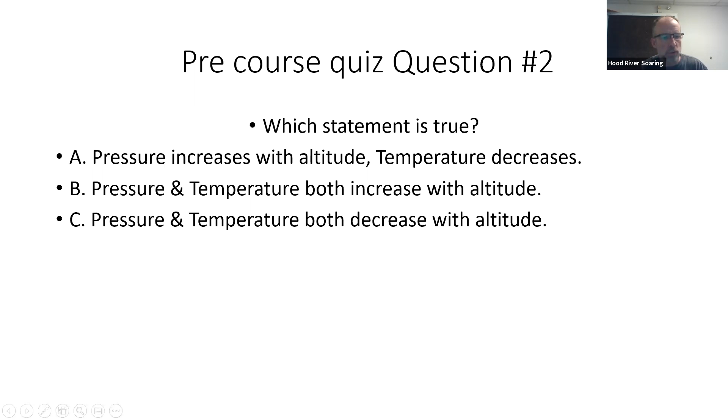Illustrate that as well. All right, so this is where I identify what the pressure instruments are. There are typically 3 pressure instruments in a glider or an airplane. They all have altimeters, and the altimeter gives you altitude. Remember, it's measuring pressure, but from that pressure it's giving you an altitude value, and it tells you how high we are. So how high are we? We want to reference the altimeter to know how high we are.

It's especially important in a glider to know how high you are, because that's the only energy that you really have in a glider. You don't have an engine to go higher. The only way that you have energy to go anywhere is with that altitude. And to determine how far you can go, you need to know what the altitude is. That's fuel in the tank in a glider is altitude.

Next up on pressure instruments is the airspeed indicator, which tells us how fast we are going. We'll go into a little more depth on that, but they are important. Notice the altimeter is important because it tells us how far we can go within a glider, and also it tells you, can we clear any terrain that we need to. But the airspeed indicator is important to know how fast you're going, because you need to have your airspeed.

Anybody who's flown already knows how important it is to have your approach speed correct. If you're flying too fast, you're going to float and use a lot more runway. If you're going too slow, the glider could stall. Very, very important instrument - many gliders, that is a no-go. If the airspeed indicator does not work, you cannot fly it. You can fly without an altimeter, but very seldom will you have an aircraft like this that you can fly without an operational airspeed indicator.

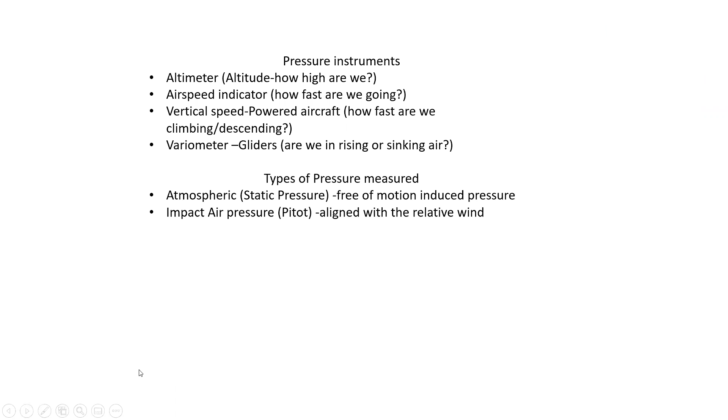Hey Steve, so a question, is atmospheric pressure the same as barometric pressure? Yes, yep, that's pretty much true. I think we look at it as atmospheric pressure in an aircraft because you are moving through the air mass, whereas typically barometric pressure, you're just thinking about it like most of us, on the ground - what's the barometric pressure at this point on the ground? But yes, it is the same thing.

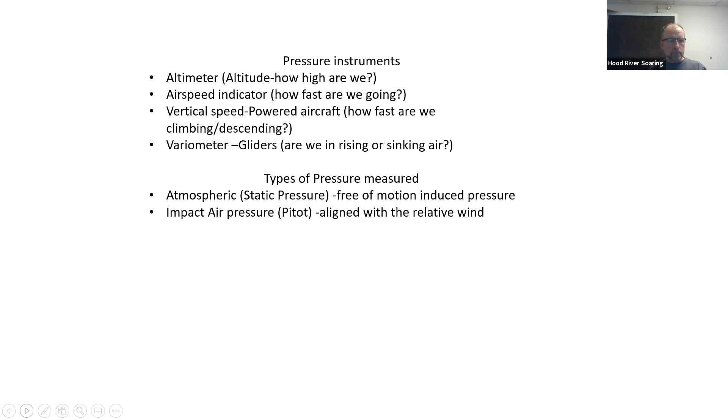The thing you need to know when you go to answer questions is that if something happens with the static system, it's going to affect all of these instruments. If something happens with the pitot tube, it's only going to affect the airspeed indicator. So that's something to remember. We'll skip forward here, next frame.

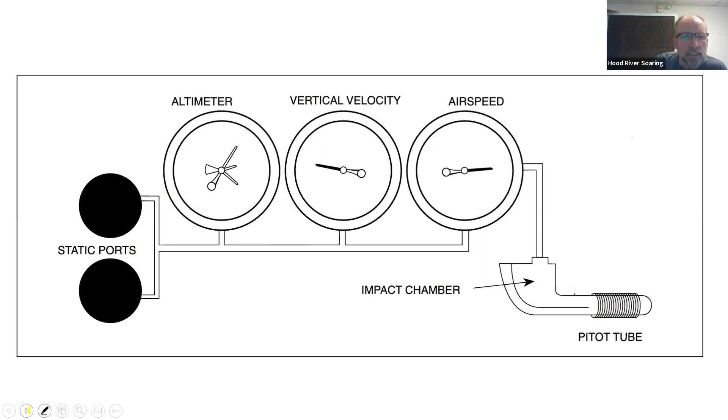One thing we as humans don't think of is air having weight or mass. We're born and live most of our lives near sea level, and when we think of air, we think of nothing, but that is not true. Air weighs 0.08 pounds per cubic foot. So in a normal bedroom, there is 50 pounds of air. You don't know it, you don't feel it, because we are used to that.

Much like a fish at the bottom of the ocean doesn't probably perceive that the water exists - it's always been there, they don't really think about it. You can't see it, but it's certainly there.

Now, where air pressure and the mass of the air becomes evident to us is when we have motion or movement involved. Like if you're going down the road and you roll down the window in the car and you stick your hand out, now you're feeling the mass, you're feeling that air. So now we can feel it - still can't see it, but we can feel it. And that's the same thing when the wind's blowing, then the mass of the atmosphere becomes evident.

Any questions so far? Anybody have anything they want to ask there?

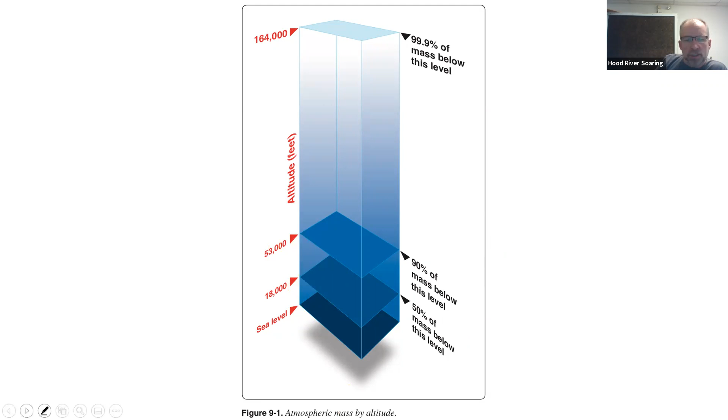Okay, next up, next question, next one. Okay, so here we go. This is a kind of similar illustration, but this adds a few things that you as pilots are going to have to remember.

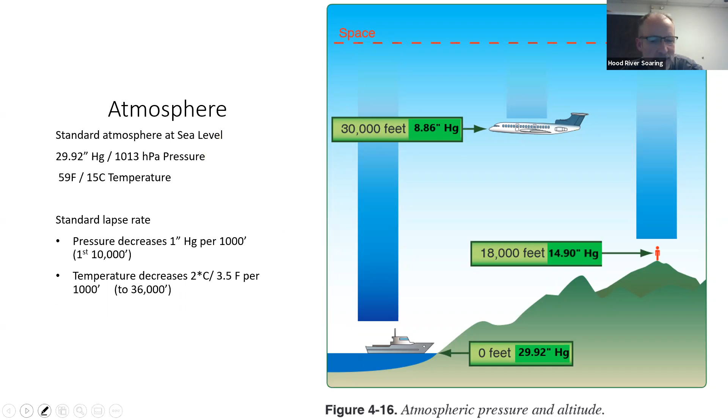But these are the important ones to know right now. Pitot tube facing forward—on some, they're out on the wing facing forward. That pitot tube wants to be out in undisturbed air. You don't want it real close to the fuselage or anything where interference air pressure could alter that measurement, because you want it to be as accurate as possible.

The static ports are on the side, and if you can imagine, those are not facing forward, so they are not going to get any increased pressure from ram air. That's what that's called, is ram air. Pitot measures ram air pressure. Any questions about that?

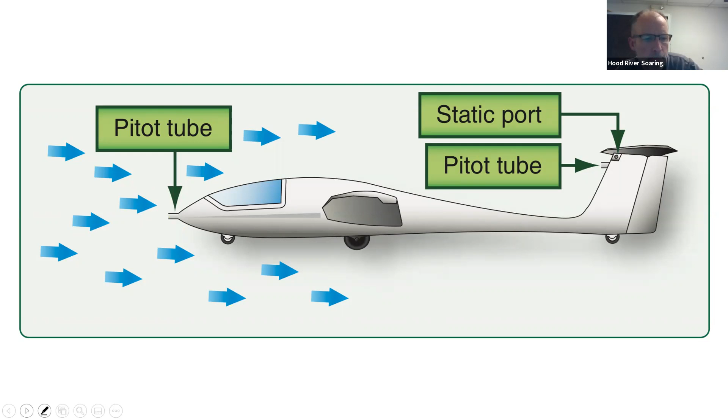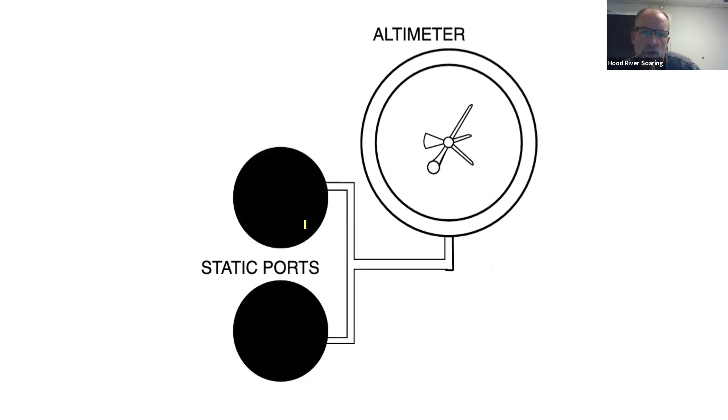Okay, so here's the diagram for the altimeter, just broken down by itself. First instrument we're going to really talk about is the altimeter, and this is your altimeter, and it goes out—this is your static system, goes out the static ports. That's all the altimeter reads, is this pressure, static pressure on the side of the aircraft, and that's how that works.

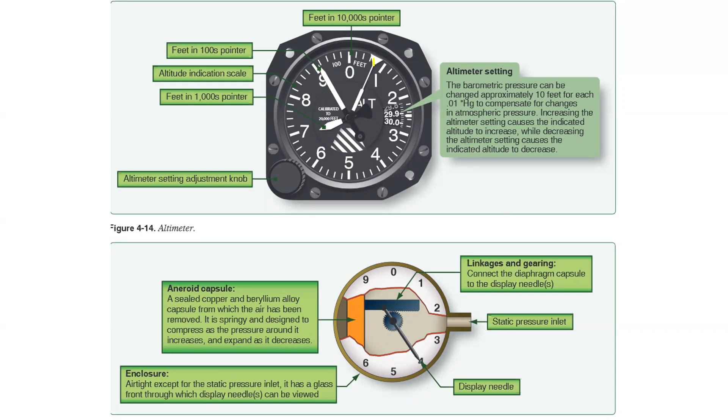I see a question pop up here: what is the triangle touching the 10,000 foot arm? The triangle, I'm not quite sure. Ethan, can you unmute and help me determine? The 10,000 foot one, the super skinny one, at the very end. Oh, that's just part of the pointer, so that will move along. Yeah, that's just part of it.

On this, many altimeters look different. Some don't have a 10,000 foot marker. There might be a little window that rolls over as you go through the 10,000 foot mark and you start counting up again. So this is generic, but yeah, that's just part of the needle, it has no other bearing.

Any other questions about this? Does anybody have a question about how this pressure increasing or decreasing would make the needle go up or down, or why the pressure is increasing or decreasing inside it? Any questions about that? Okay.

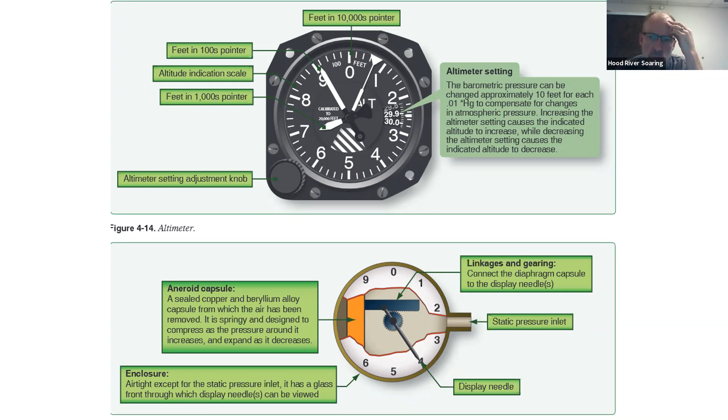Moving forward, okay, so here we have some altimeters. I'm going to pick on some people to tell me what these altimeters read, so you can start taking a look at it, see what you think they read, and I'll pick some people to unmute and tell me what they see on these altimeters.

While they're taking a look at that, prior to takeoff the altimeter should be set to the current altimeter setting. You'd get that from a tower or weather report, or for those of you who've been at Hood River, there's a frequency there for AWOS that will tell you the current altimeter setting. You can dial that in right here.

Now, you may have noticed we don't really do that with the glider. We know what the altitude is at the field, we know it's 638 feet, we usually dial that in for 600 feet. If you know what elevation you're at on the airport, you can also do it that way. You could set the pressure from an official source for that time, and your altitude should indicate field elevation, or you can set field elevation and from that tell what the local altimeter setting is. So it works both ways.

If the altimeter setting is not available, the altimeter should be set to the elevation of the departure airport. One thing to think about is that airports are not all totally level, so if you're really looking for an accurate altitude setting, you need to know the altitude on each end of the runway -- it might be 30 or 40 feet different at different points on the airport.

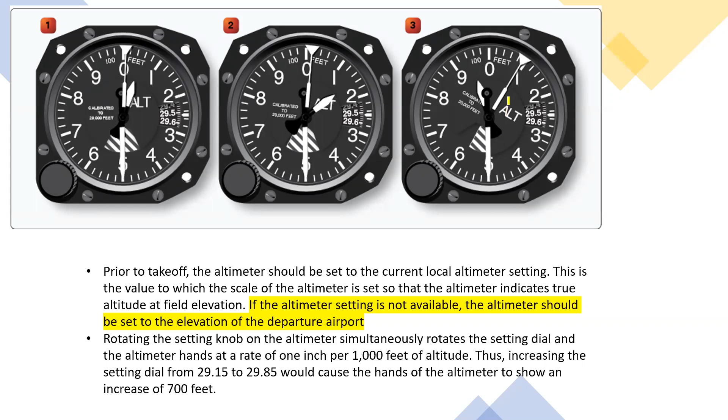Oh, so it's 9,500, yeah, 9,500. So that's it really, there's no tens of feet here. So this would be, it shows it's just short of 10,000 feet. If you went up another 500 feet, this would wind up here to the 0, that one and these would both be pointing out, and that would be right at the 1, then you'd be at 10,000 feet. But you're just 500 feet short of 10,000. Does that make sense? Yeah.

Okay, cool, good. All right, and this is something that with practice you'll just glance at it and you'll know it, but it takes a little while to get your head wrapped around it. So definitely, this is why we're having class, to figure these things out. All right, does anybody have any other questions about what these altimeters are reading, or any confusion about what they're reading, or anything here that we've followed so far?

The black and white stripes, down here at the bottom. You know what, I don't know what those mean. I'm not sure what those are, but we can find it out, we can look it up. I will look that up, because I want to tell you that preparing this class, I've learned a few things that I didn't know or didn't know very well.

So this is a learning experience for all of us, and as you progress through your aviation career, you're going to be constantly learning. That's really one of the cool things about flying for me, I love learning new things, and I like things that are a little bit complicated. So we're all going to be learning in this ground school course, including your instructor. And one thing I've learned is that I'm not going to try to tell you that I know something I don't know, I'm going to admit it. I just don't know, so I'll look that up, I'll get back to you. It was Vince that asked that.

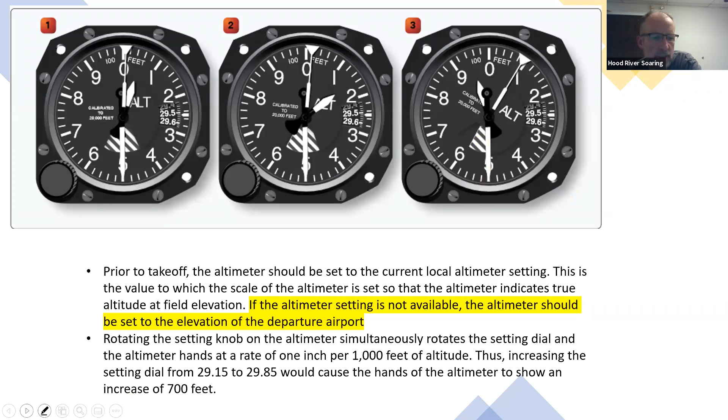All right, so okay, let's see, we're going to move up to the next frame here. I can get it to move. Okay, so different types of altitude.

When we put this ground school together, there was some question. People were interested to know what different acronyms meant in aviation, and that's something that we, as you know, have been flying for a long time and have picked up on a lot of this stuff. You learn it as you go and don't really think about it too much. But somebody who's just coming into it, they're overwhelmed by all these terms and acronyms. So we're going to make a real concerted effort to focus on terms and acronyms associated with aviation. These are items you're going to want to commit to memory as well.

So these are different types of altitude. Indicated altitude is the altitude you read off the altimeter. You look at the altimeter and that number, that's indicated altitude. You may be flying along and air traffic control or a tower might ask what your altitude is, and you're going to report back your indicated altitude. That's what you tell them.

Next up is absolute altitude. Absolute altitude is your height above the surface, above the terrain. So if your altimeter shows you're at 10,000 feet, but you're over Hood River, which is 600 feet, then your absolute altitude is 9,400 feet. That's your altitude above the ground, and that obviously changes as you're flying along. You fly over a mountain, that can change dramatically. The altimeter does not tell you how far you are above the surface. It tells you how far you are above sea level when the altimeter is set with the correct altimeter setting. So absolute altitude is the altitude above the surface.

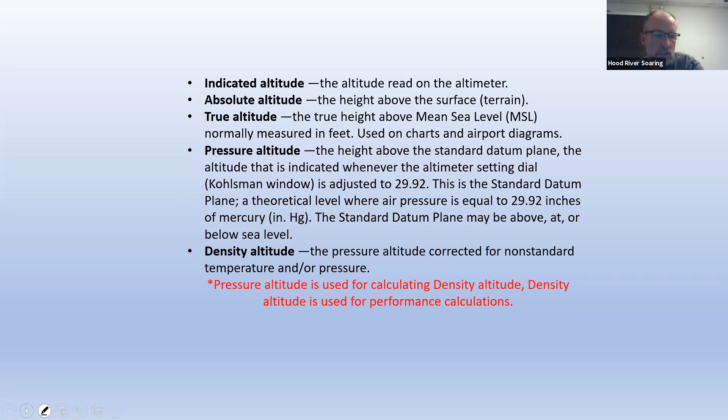So when you are planning your takeoff, or going to land at an airport, and you need to find out how much runway you're going to use, or how fast the airplane or glider would climb, that's where you will use pressure altitude and density altitude. Pressure altitude is used for calculating density altitude, and density altitude is used for performance calculations. So this is all these are ever used for, figuring out the performance of the aircraft you are flying. I've got some additional slides here that hopefully will illustrate this a little better for you. Does anybody have any questions so far? Please let me know if you do.

You're flying along and you're actually flying with these important ones: true altitude, expressed as MSL, mean sea level, altitude above sea level. That's what you will have on your altimeter if you have it set to the correct altimeter setting, which you would get from weather reports. Absolute altitude, once again, that's not shown on the altimeter. The altimeter does not know how high you are above terrain.

There are other instruments that may tell you how high you are above terrain. Usually those involve radar, or they might involve GPS, because GPS can determine your altitude and also the elevation of the terrain below you. It could give you an absolute altitude indication, but the altimeter is never going to tell you your height above terrain. That's something you've got to work out based on your charts and knowing how high the terrain is, and then how high you are flying.

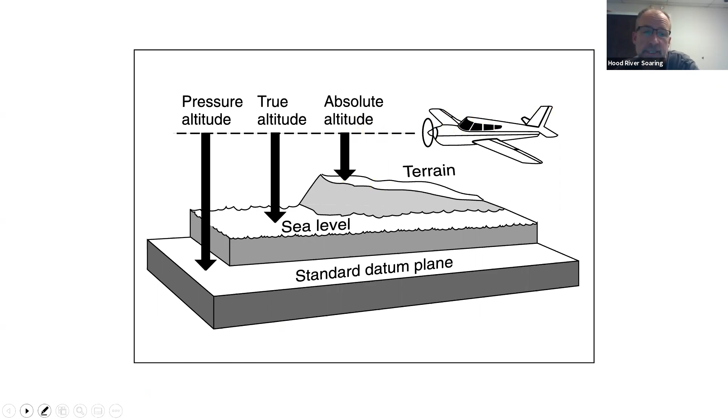Any questions about that? All right, I must be a great teacher, no questions. So...

Let's see here. So the last thing we need to discuss that's important for you to know for your practical test—there are some questions that ask you this. Fortunately none require you to do any math or come up with an absolute number, but they will ask you to understand the concept. So this is the concept. When I first started learning to fly and taking ground school a long time ago, I remember this, and it still sticks in my mind.

It's a rhyme that pilots use to remember something important: from high to low, look out below; from low to high, you're in the sky. It's pretty easy to remember a little rhyme that helps us remember this principle, and sometimes it can be a little difficult to wrap your head around. So I'm not going to get into great detail, but I'll try to give you the best information I can.

When you're flying between areas of non-standard pressure—we know 29.92 is standard pressure, but that doesn't really exist, especially across a wide area. If you're flying a long distance, or in the air for quite a while, like in a glider flying 3 or 4 hours on the ridge, that pressure could change as you're coming back. Fortunately we can adjust for that. We can call in or dial up the radio, find out what the AWOS says the pressure is, and get our altimeter corrected as that pressure changes.

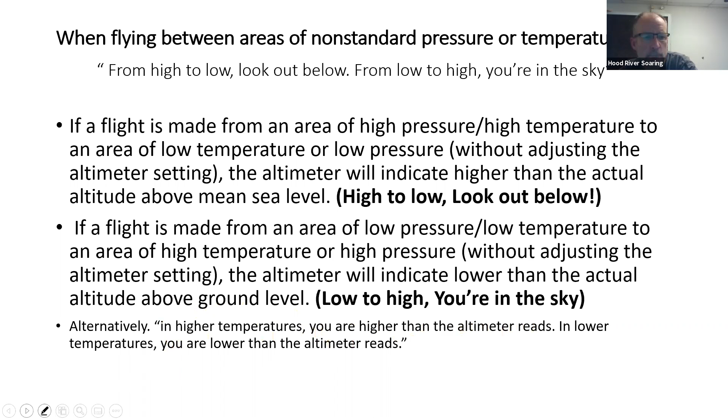I've got a couple illustrations here that line this out to illustrate it a little better. So here is 15 degrees Celsius, 59 degrees Fahrenheit. Let's see, how about...

Vinny, unmute your mic here real quick, I got a question for you. You with me? Yeah, sorry, I just got a movie in the background. Okay, great, cool.

So Vinny, right here in the middle of this illustration, over here it's 30 degrees Celsius, which is 86 degrees Fahrenheit. That's pretty hot. And down here on the other end, we've got 0 degrees Celsius or 32 degrees Fahrenheit, that's the freezing level. That's pretty cold.

What about this one here? What are you reading here for temperatures, right down at the bottom? What am I reading for temperature? It's right on there: it's 15 degrees Celsius and 59 degrees Fahrenheit.

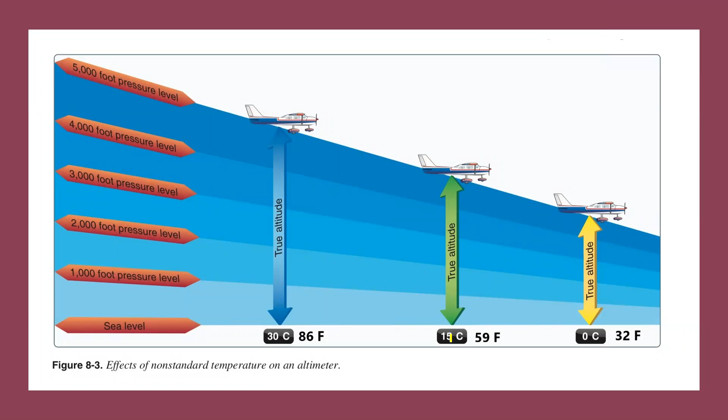Okay, all right, and we just talked about that a little earlier. I said we needed to commit that to memory. What is that temperature? What can you tell me about that temperature? That's standard temperature? Bingo, that's right, that is a standard temperature. And at standard temperatures, there's no variation in your altitude.

So the true altitude, your indicated altitude and true altitude are correct. If your altimeter is reading 5,000 feet, you are at 5,000 feet when the temperature is standard. Does it make sense? Yep, makes sense.

Okay, all right, all we're talking about right now is just variations as far as the temperature, because that's what we're talking about: high to low, look out below. We're looking at that as a perspective. So at standard temperatures, it's right.

Now look back here, it's much hotter, it's warmer. Warm air expands, it's spreading out, and what you see is that these pressure levels are also spreading out. So back here we're showing we're at the 5,000-foot pressure level, so the altimeter sees a pressure that it interprets as being 5,000 feet, but we're not at 5,000 feet, we're well above it, we're up here, maybe it's 6,000 feet. So colder... I mean higher temperatures, you're higher than your altimeter is indicating. Low to high, you're in the sky, you're high.

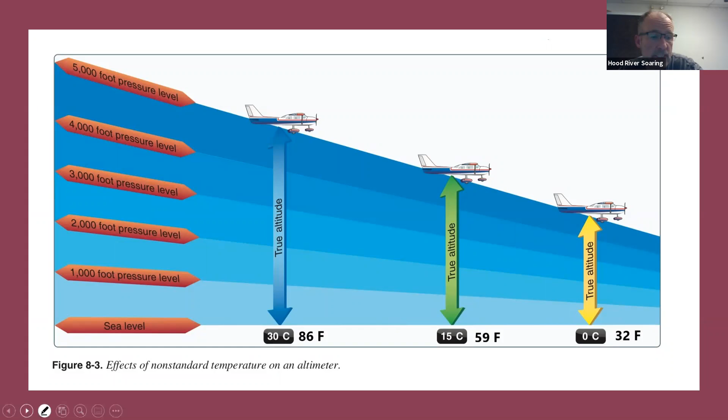Here's another one that illustrates it. Your reported altitude, let's say this is 5,000 feet. If you're in higher temperatures, you're actually higher than what your altimeter says, which is less of an issue than when you get to a cold temperature and you're below what your altimeter indicates. So what we've discussed here are ways the altimeter could be inaccurate, which is important for you to understand.

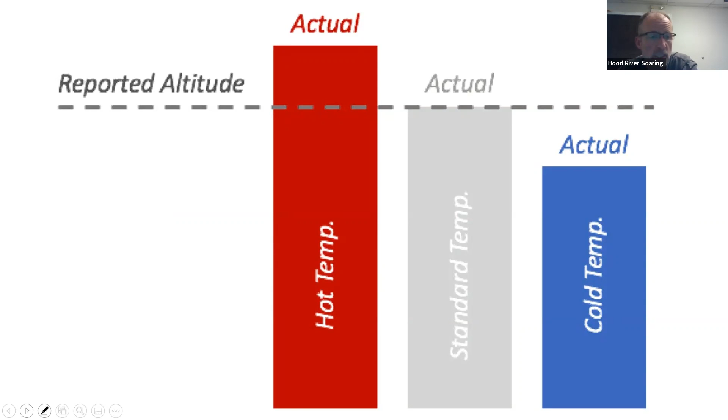Here, a temperature of -10 degrees Celsius, and the aircraft altitude is 1,000 feet. So we have -10 in this column, and the aircraft altitude at 1,000 feet. Your altimeter is showing 1,000, that's your indicated altitude, but the error is 100 feet below that. So the altimeter setting may place the aircraft as much as 100 feet below the altitude indicated. That's the scale of error we're talking about.

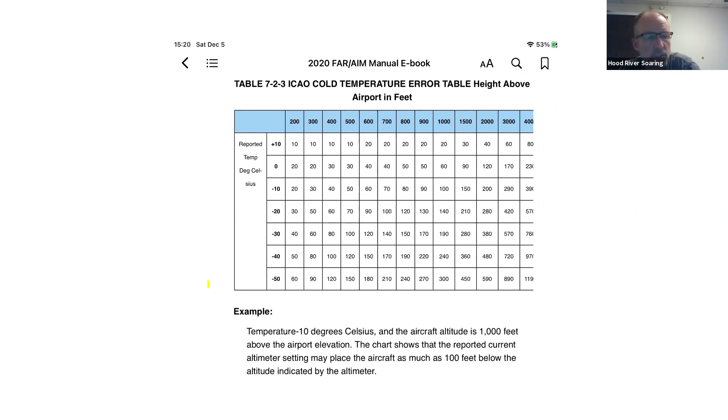Maybe not a deal breaker. Closer to the ground, it's less of an issue. At higher altitudes, it's more pronounced, but you do need to know: high to low, look out below; low to high, you're in the sky. Commit that to memory, you're going to need it to answer some questions on the written exam. I think that pretty much covers altimeters.

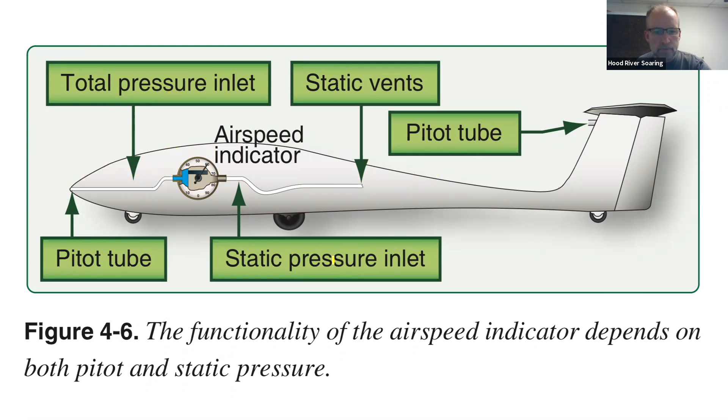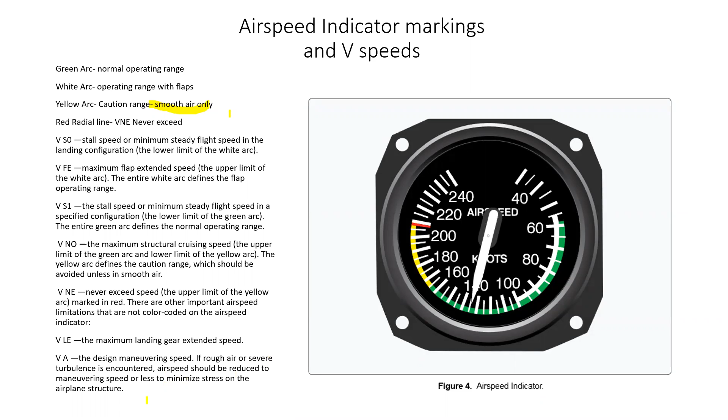There are other important airspeed limitations that are not color coded on the airspeed indicator: VLE, the maximum landing gear extended speed, and VA, the design maneuvering speed. If rough air or severe turbulence is encountered, airspeed should be reduced to maneuvering speed to minimize stress on the airplane structure.

So how about VA? Can you find VA on this airspeed indicator and know where that's at? Okay, I'm going to hold you up there. I'm not supposed, as an instructor, to ask any trick questions.

VA is an airspeed that's never shown on an airspeed indicator because it changes depending on the way the aircraft is loaded, so that's something you have to calculate. A heavier aircraft, believe it or not, has a higher design maneuvering speed, and when it's more lightly loaded, you can't fly as fast. Once we get into some aerodynamics, we'll go into that in detail so you'll understand why that is true. But VA is not depicted on the airspeed indicator.

And VLE, maximum landing gear extended speed, that's also not shown on this. VLE might be important in a glider because some of them do have retractable gear, though whether or not they have a maximum landing gear extended speed, I'm not sure.

Okay, thank you very much, Vinny. All right, so those are your V speeds.

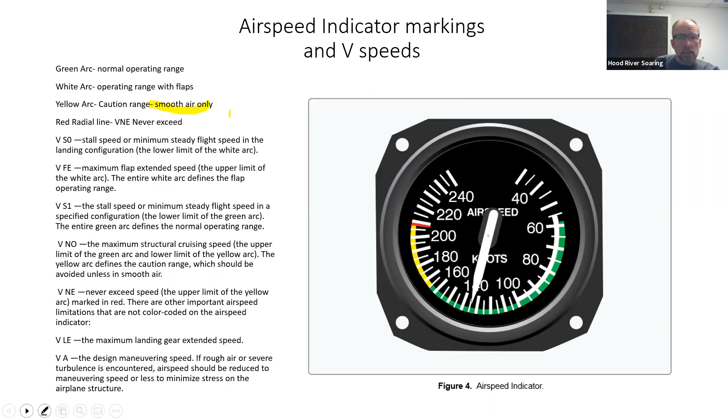All right, so here is an airspeed indicator, similar to the picture that we saw previously of an altimeter. Only thing is, on an airspeed indicator, remember we have two pressures that we are comparing.

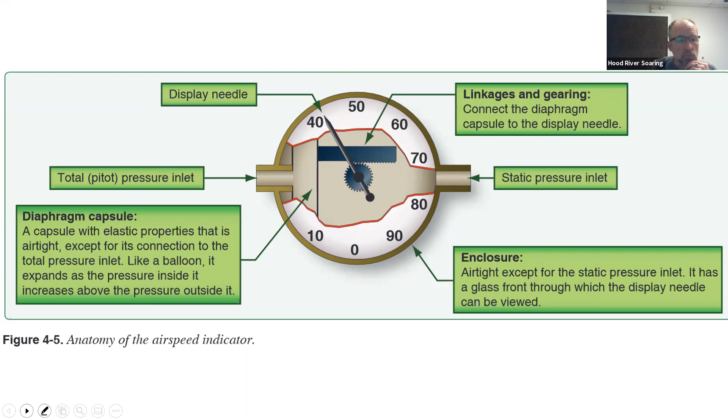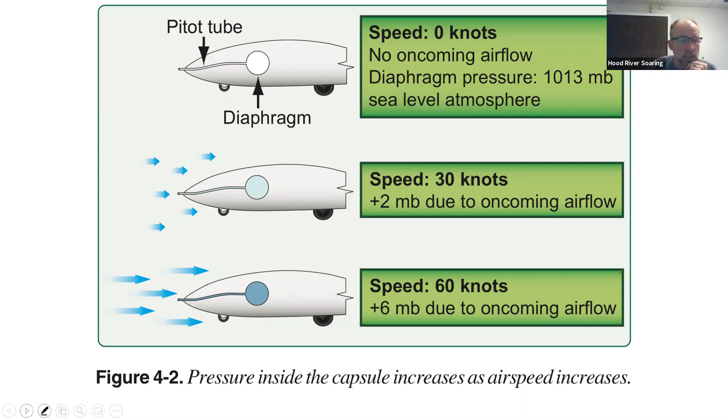It really is. They're really pretty simple systems. They work very well, except when there is a problem.

And that's this here. Here we're going into the section about problems. What are the potential faults? The potential faults in a pitot-static system are if they are restricted or plugged. There the pressure can no longer travel, or the air molecules can no longer travel in or out through those ports to the instrument. And that would be caused by dirt or debris in the lines or at the ports.

That's why we cover up a lot of these instruments, like the pitot tube. We're going to cover it up when we're not using it so that an insect doesn't crawl in there, or dirt and mud might go in there when we're not flying. So we inspect those during our pre-flight inspection. Insects could also possibly block that.

And here's the big one: ice, and not so much on gliders because we're not going to be flying in known icing. But one thing you could get, now that we're doing winter operations, is ice could form over these ports while it's parked. So it's very important to make sure there's no ice restricting or blocking that.

Other possible faults, although less common, would be leaks in the system - possibly a line that's loose, or maybe a line has a pinhole leak in it, or something like that. Very uncommon. It could happen after it's been repaired. Maybe the mechanic is supposed to test that stuff, but that's someplace you need to be especially conscious of problems - after maintenance.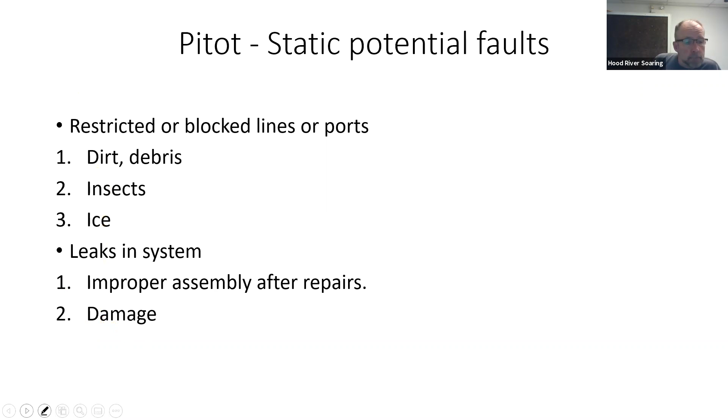This is probably, of all the problems you could have, airspeed is a really critical instrument to have, and you need to know it, but if it's registering 0 and you're flying, you know that you're not flying 0. So this is a problem where, hey, I cannot trust this, so we're going to forget about referencing that, and we're going to use whatever other means to ensure that we're flying at the speeds that we need to get back on the ground.

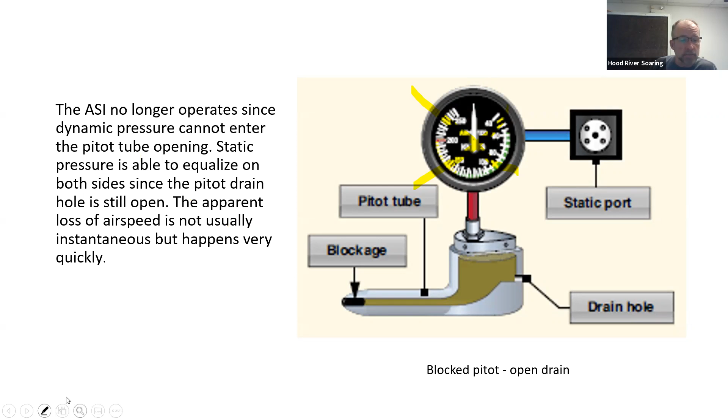Anybody who's been flying knows that when you're diving, airspeed typically increases, and when you're climbing, airspeed decreases. This is doing the opposite. Pilots have actually died from this. In instrument conditions or at night, they misinterpret it, not realizing it's frozen up. They might be descending, the airspeed drops, and they think they need to lower the nose to keep airspeed up. They push the nose further forward, it continues to drop, and they end up crashing.

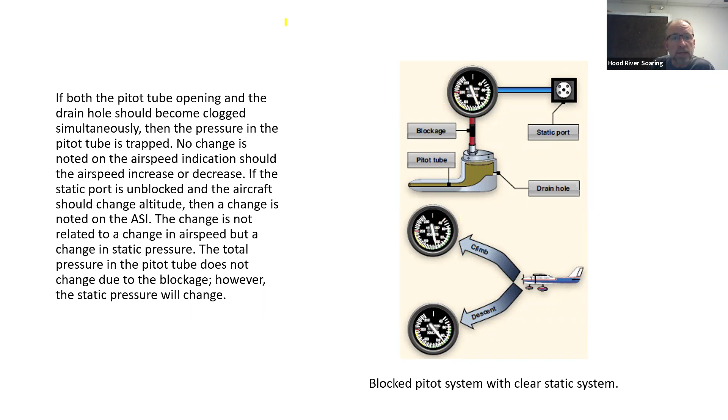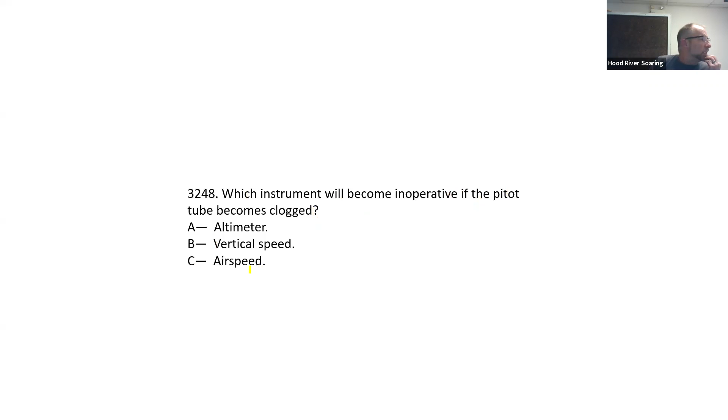All right, so what instrument will become inoperative if the pitot tube becomes clogged? We had 60% say airspeed indicator, and that is correct. The airspeed indicator is the only instrument that the pitot tube feeds.

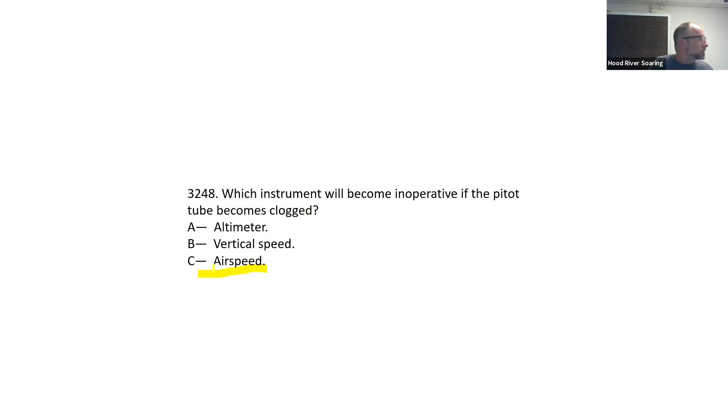All right, so we're going to go to the next question, 3249. Let me move up. Okay, 3249, everybody read that, see how the question pops up in your quiz. Which instrument will become inoperative if the static vents become clogged?

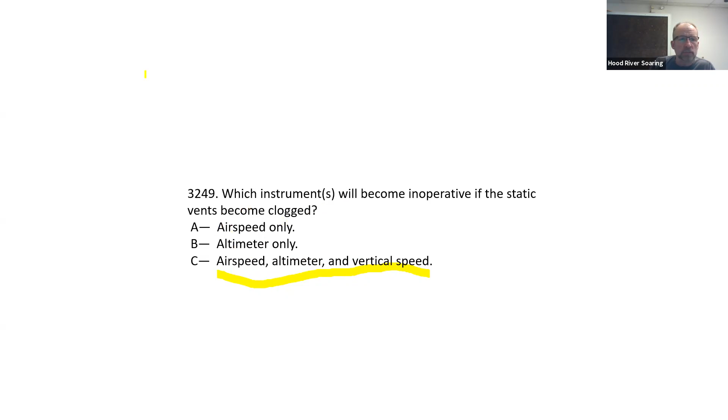Good, all right, so next up is 3262, you should have that one up on your Slido. Pitot system provides impact pressure for which instrument?

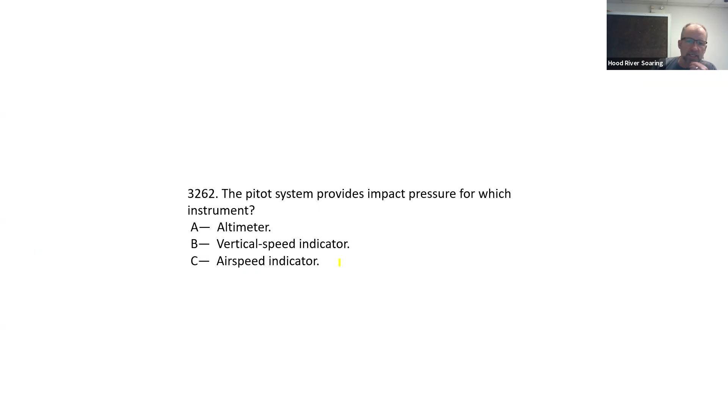Great, everybody got that one right. Fantastic, airspeed indicator, pitot system. Excellent, and these are actual questions, so if you're going to take the written exam, these are the ones you're going to see or may see on the exam.

I'm sort of noticing a pattern of C. Yeah, I know, I did too. So I guess if you're taking the test and you don't know the answer, you can guess with C. I would suggest knowing the answer, but yeah, you're right. C, I've read that somewhere. C is the popular choice. I don't know why that is. I think they figure that out.

3247 should be up on your screen and in Slido. So if the pitot tube and outside static vents become clogged, which instruments would be affected?

We have 3 answers in so far. Got all 5, everybody got that one right. Excellent, that's right, these are your pressure instruments.

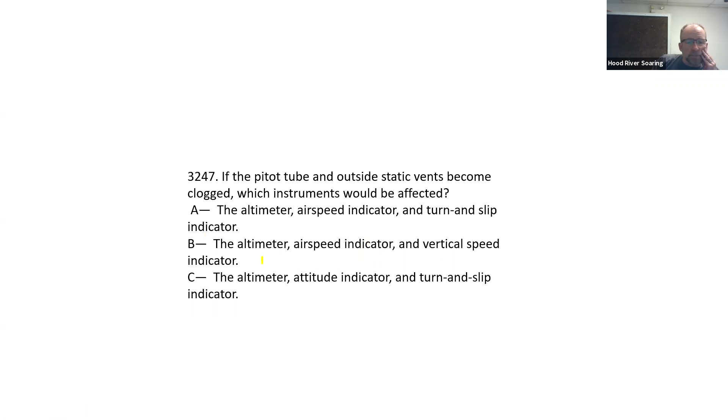All right, next one up. Let me activate that. Here we go. Which V-speed represents maneuvering speed?

Okay, so this is when it looks like we've got some confusion. So let's go over this a little bit.

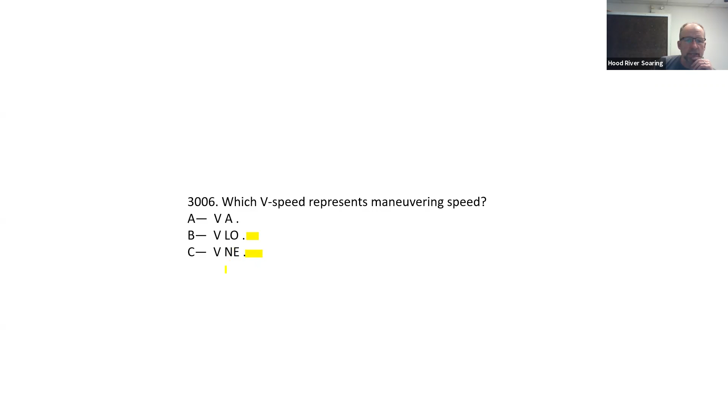VA can be a little difficult, because VA, what is it? I don't know what it stands for necessarily, but that is maneuvering speed. But these two are pretty easy to eliminate. VLO is landing gear operation, and VNE is velocity never exceed - remember, that's your red radial line. So that leaves VA. VA is maneuvering speed.

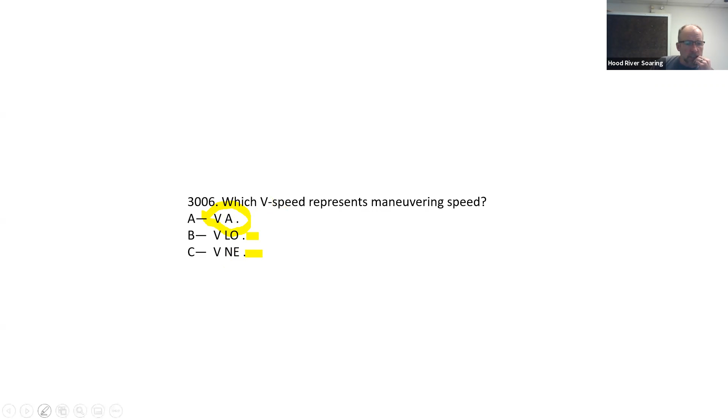All right, these V-speeds are something that takes a while. You're going to want to get a list, kind of go over them, review them, and then you're going to learn them, and you're going to know them when it comes time to take your test. Or if you're talking to the examiner when you take your practical exam, you're going to need to know this stuff. He will ask you these questions, or may ask you.

All right, so 3264 is next. Looks like we've already got one answer in here. What does the red line on an airspeed indicator represent?

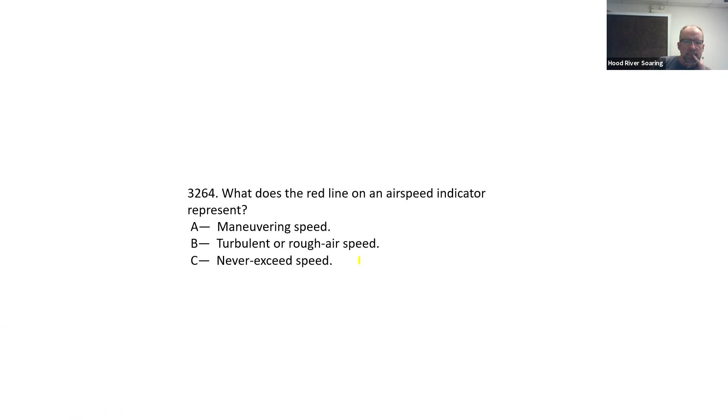We got 4 or 5 answers, everybody got that one right. Velocity never exceed, very important speed to know. And what is that one called? It's called VNE, velocity never exceed.

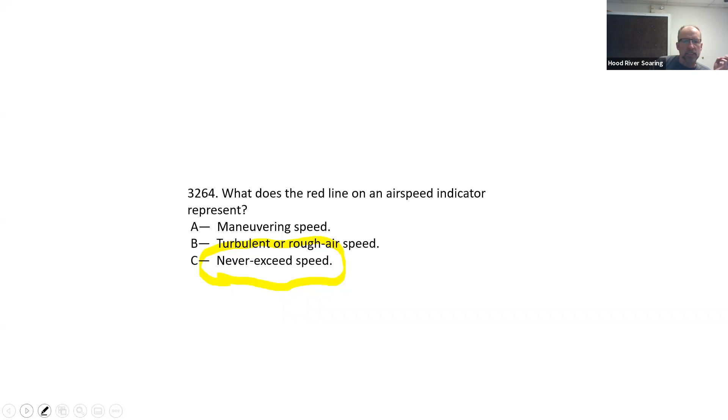All right, here we go, 3268, that one up. Which color identifies the never exceed speed? Darn it, gave this one away on the last one. All right, everybody got that one. All right, good deal.

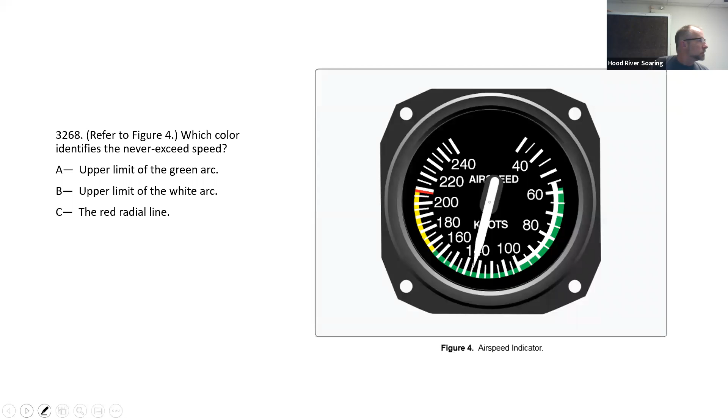3007, here we go, another V-speed. Which V-speed represents maximum flap extended speed?

All right, everybody got that one. Good deal, all right, moving along. VFE, velocity flap extension.

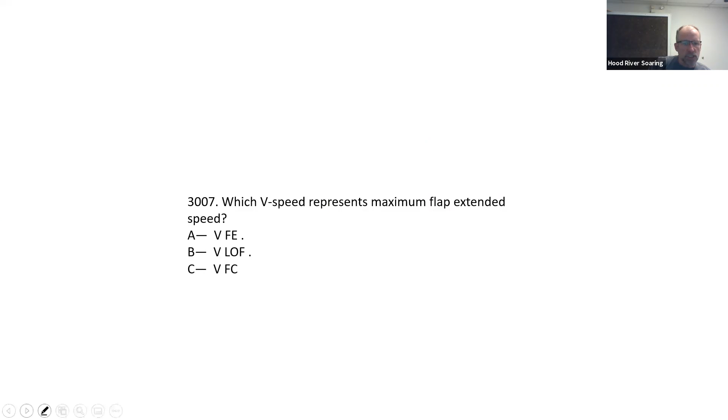All right, 3008 is next, it's live. Which V-speed represents maximum landing gear extended speed? Landing gear extended speed.

A is correct. I'll make sure that that's correct, because VLO is typically landing gear operating speed, and LE would land - so this is something we're going to go back and look at, because I may be wrong about this. It takes a lot for an instructor to admit that they're wrong about something, or maybe wrong about something, so I'll go back and verify this. Landing gear operating speed and landing gear extension speed are two different things. The LE is the speed that you can have the landing gear extended, and LO may be a lower speed that you could operate the landing gear. So we'll go back and double check that one. I saw the confusion and now I'm a little confused, so we'll refer back and take a look at that and see what that one is.

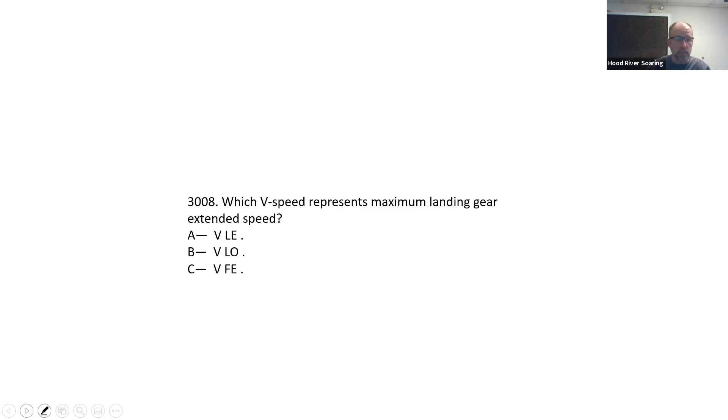Next up, 3010, and that question's live. VSO is defined as: A, stalling speed or minimum steady flight speed in the landing configuration; B, stalling speed or minimum steady flight speed in a specified configuration; or C, stalling speed or minimum takeoff safety speed.

Okay, looks like we got all the answers in, and we got some splits on this one. I don't know if you guys are changing your minds or thinking about it.

VSO is stalling speed or minimum steady flight speed in the landing configuration. Landing configuration is with your flaps extended, you are coming into land. VSO, that's that lowest speed, that bottom of the white arc. Stalling speed or minimum steady flight speed in a specified configuration, which can be confusing, that's with your flaps retracted, your landing gear retracted. That would be your stall speed clean, that would be VS1. VSO is stalling speed or minimum steady flight speed in the landing configuration.

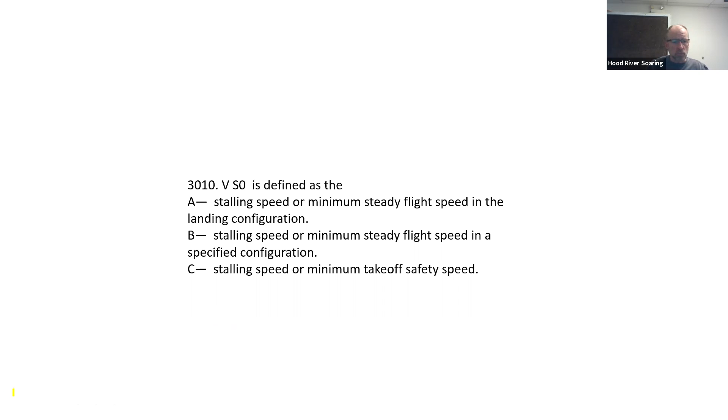All right, 3266 is coming up next, and that question's live. What is the caution range of the airplane in this airspeed? What's the caution range for this airspeed indicator?

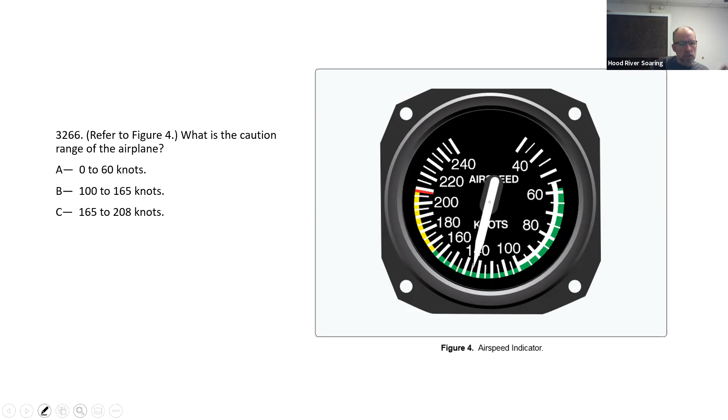All right, everybody got that one right. 165 right here to 208 knots. That is correct, that is the caution range.

Next question, 3106. Prior to takeoff, the altimeter should be set to which altitude or altimeter setting? A, current local altimeter setting if available, or departure airport elevation. B, the corrected density altitude for the departure airport, or C, the corrected pressure altitude for the departure airport.

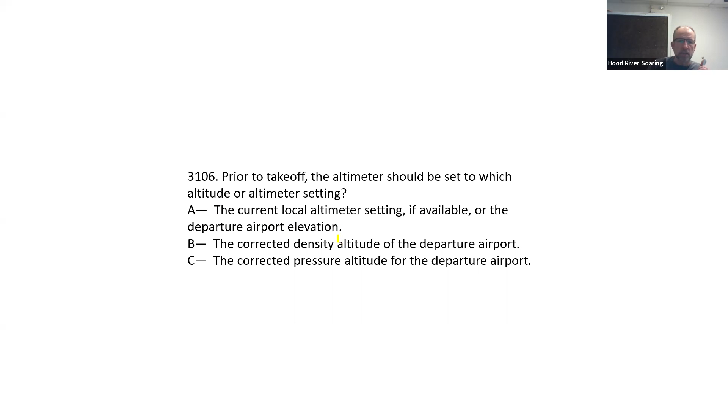Okay, looks like we got all the answers in, so A is correct. Remember, we're going to set that for the current altimeter setting, which we would get from the AWOS on the radio, or a tower if you were at a towered airport, or from a weather report that shows the current local altimeter setting. Or if it's not available, the departure airport elevation, that's where you set on that altimeter. So we're sitting on the runway and we're ready to go behind the tow plane, that's how we usually set it. So A is the correct answer on that one.

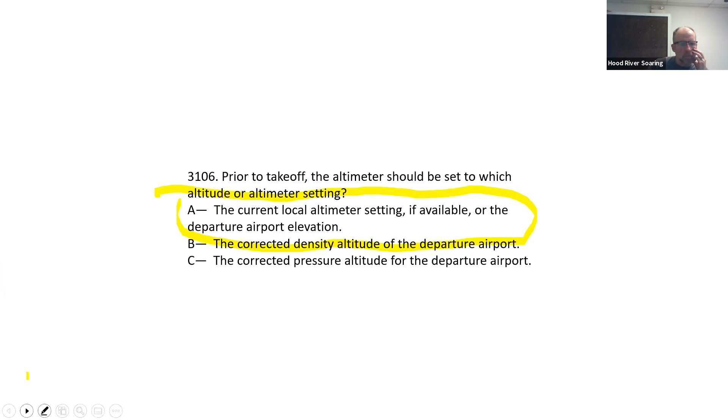All right, next up. 3250 should be our next one. Okay, here we go, so here's your altimeters. And you can select, let me get that active. Okay, so that question is active now. And you can select, what does altimeter 1 indicate?

Altimeter 1, this one over here is what we're reading. Altimeter 1 indicates 500 feet. So if we started out from 0, these would all be at 0, move 100, 200, 300, 400, 500. That's your hundreds now needle right there, right? And this is the thousands, and we're halfway between 0 and 1,000 would be 500 here. So you see, we're basically seeing it in 2 places, right?

Okay, so next up, altimeter 2, get that question up, 3251. That one should be live. Now we're looking for altimeter 2. What does altimeter 2 read?

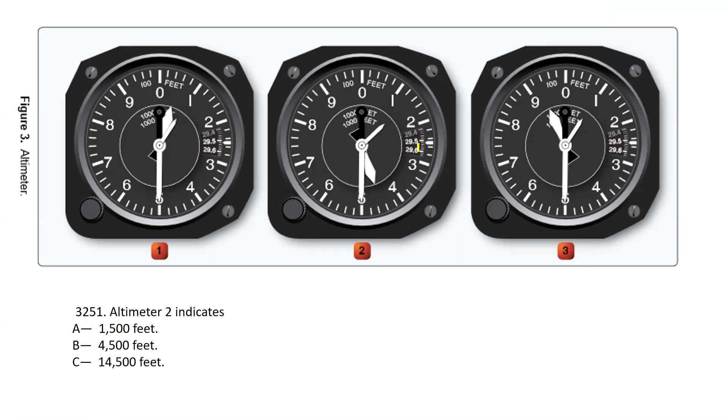I haven't seen that tiny arm before. What is that, the little one on this altimeter? This is a different style. This is the 10,000s, thank you. Tens of thousands, yeah. The first one we looked at had a skinny one, but it went all the way out, had the little reverse triangle on the end. But that's the 10,000 feet. And you can see here it also says 10,000 on the inner one, and 1,000s on this one, it kind of helps a little bit.

And then here, that's kind of cool, it says, I like this altimeter, it's 100 feet on that. It says hundreds of feet out here on this outside scale. So this tells you your scale of your various needles.

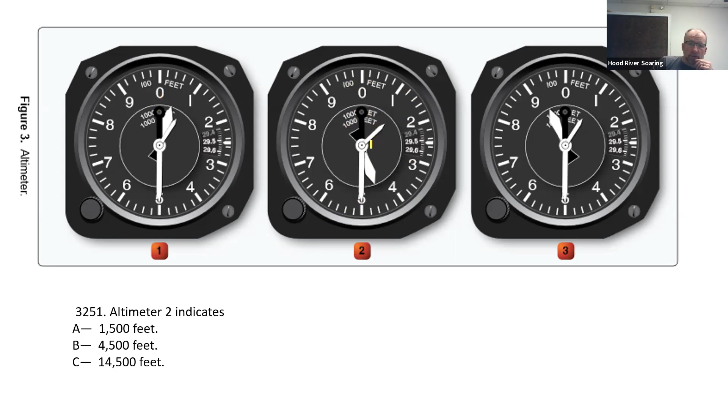Okay, all right, so yes, it's 14,500 feet is what this is indicating. This tells us we're above 10,000 feet because this is the tens, so we're above 10,000 feet, we know that. So it's got to be 10,000, and then here's 4, so 10 plus 4, 14,500, 14,500 feet.

All right, next up, 3253. 3253 is live. Which altimeter indicates more than 10,000 feet? So one of these 3 indicates more than 10,000 feet.

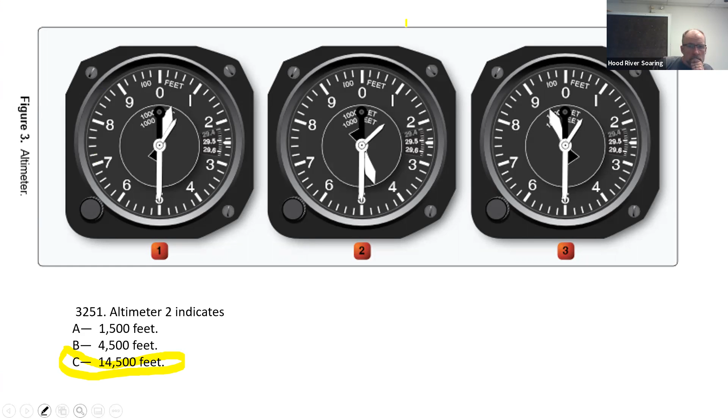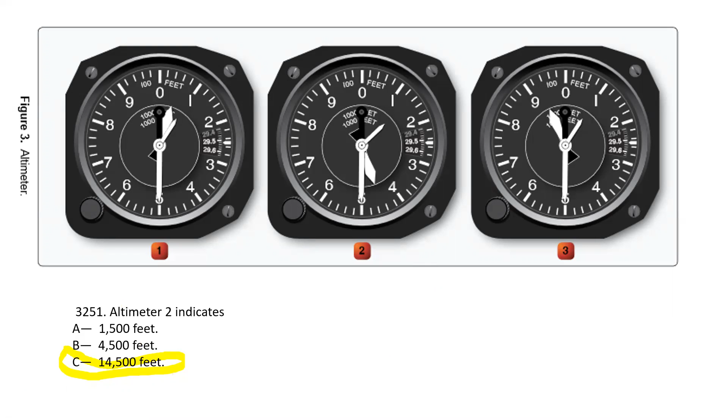You want back a slide? Go back a slide? Oh no, did I? Yeah, oh, sorry about that, my mouse is getting a little twitchy here.

Which altimeters are indicating more than 10,000 feet? Okay, yeah, 1 and 2 is correct. And I'm trying to get a little tricky here, but yes, you are. That one's 10,000, you're just a little over that 0, 10,500 on that one. This one here is 14,500.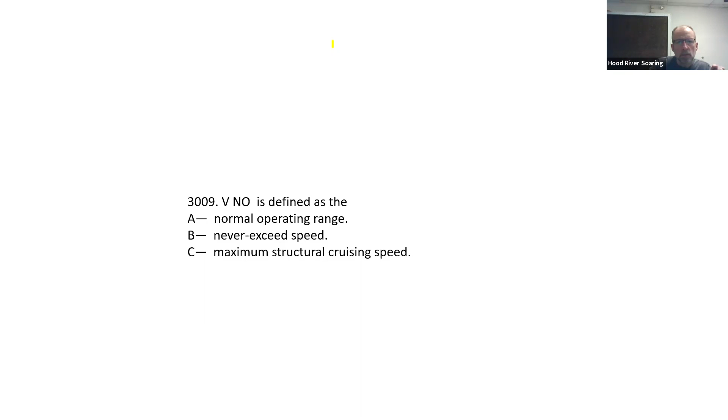All right, so that is it. I hope this information was helpful, I hope you learned something from it. If you see points in there that you have confusion about, I would be happy to discuss it with you later. If you want to email me, everybody should have my email address.

And then go back to that section. Everything we discussed should have been in that section of the glider flying handbook that was assigned. I wanted to check that one question, I guess maybe I'll check that out and email everybody and let you know what the correct answer was. But I think you guys did pretty well on the whole.

So any thoughts, any questions, any feedback? Vinny?

Good, all right cool. I was wondering, was there - I mean there probably is, but is there a thermometer on the glider? You know what, I don't believe there is a thermometer on the glider.

The AWOS tells you though. Yeah, that's right, you can pick up the local temperature from the AWOS. A lot of airplanes do have a thermometer to tell you what the temperature is, especially a more advanced airplane flying at altitude - you have to use that to calculate your true airspeed at altitude. But to be honest, I don't think the glider does.